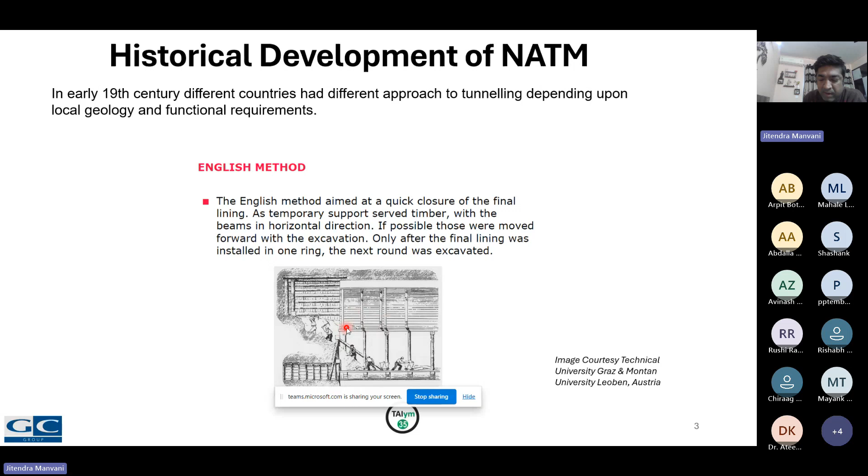I'll just take the pointer. If possible, those were moved forward with the excavation only when the final lining is installed. So after the final lining is installed, the next step is to do the next excavation.

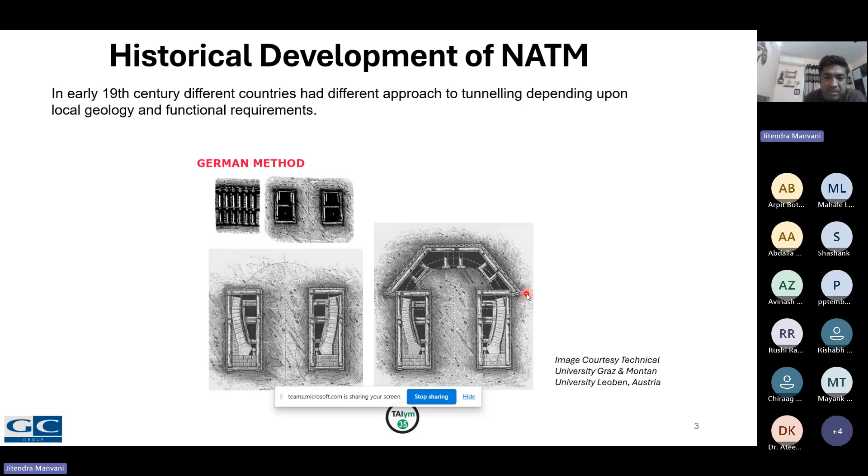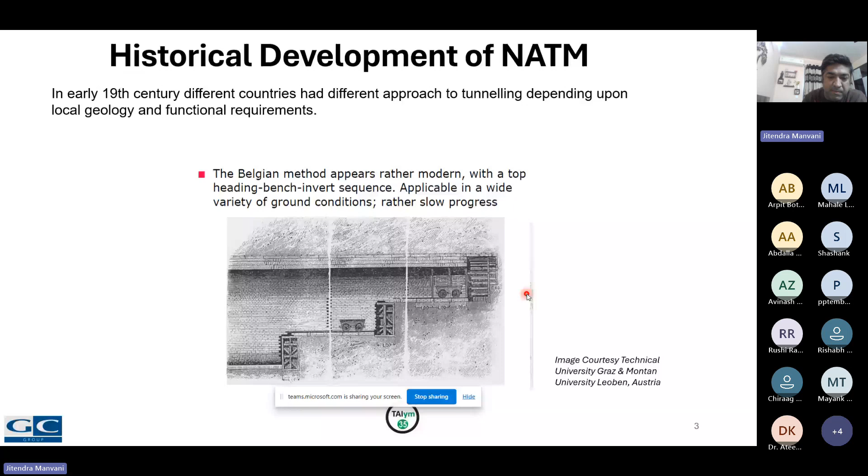The Belgian method is more modern compared to the previous method, having sequential excavation with top heading and benching, which is applicable for a wide variety of ground conditions. Because it is sequential, it will be rather slow in progress.

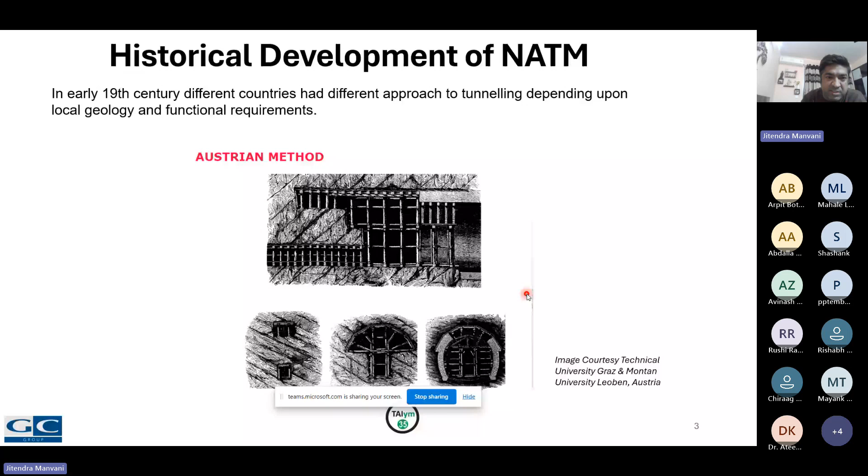The first idea of NATM: Rabcewicz in 1948 patented a tunneling method based on a double concrete shell approach, where the inner lining should be installed when the deformations have ceased. A quickly installed primary lining should avoid disintegration and thus development of dead load on the liner. With this method, waterproofing between the primary and inner lining was made possible, and the design of the inner lining can be done based on measuring results.

This is the sketch which was first presented in the lecture Geomechanics Colloquium in 1962 in Salzburg by Mr. Rabcewicz, where he gave the method the name New Austrian Tunneling Method. The original design is shown on the left side, which was later modified to optimize the design.

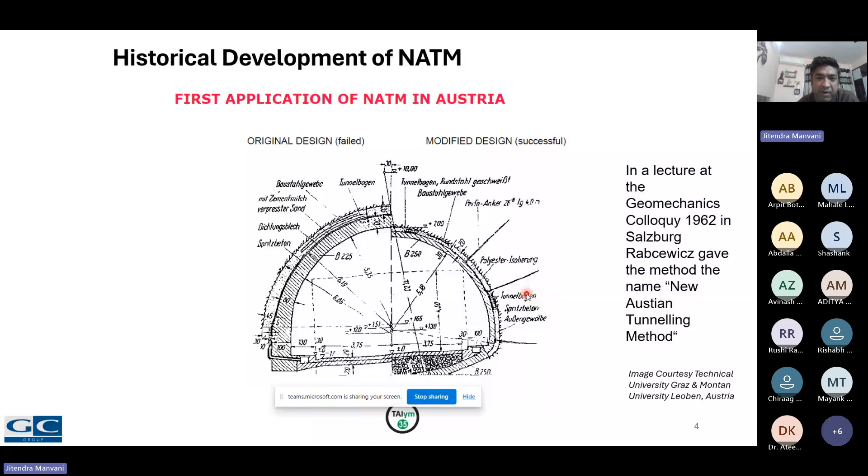This is an image showing NATM works. You can see clearly the top heading is already excavated and the bench excavation is in progress, with invert excavation yet to be done.

You can clearly see systematic bolts all around the benching and top heading, and somewhere the lining stress controller, meaning this particular condition is a squeezing ground condition with high overburden. To absorb the deformation, normally lining stress controllers are provided.

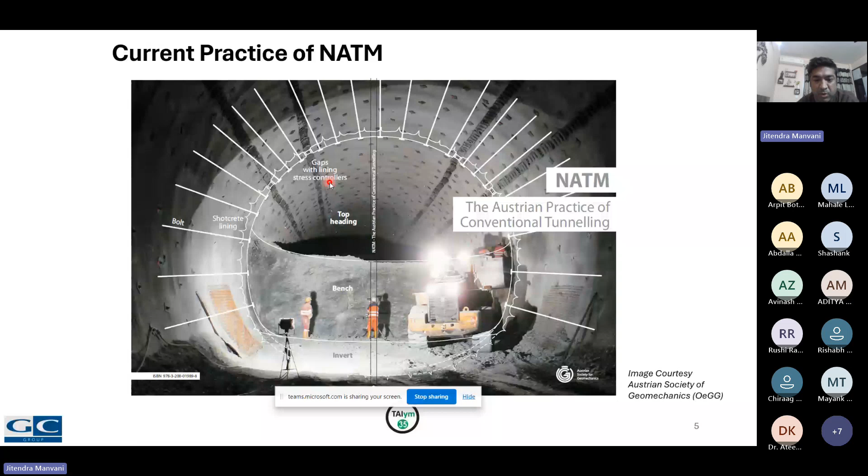So what are the basic principles of NATM? Firstly, you have to prevent the disintegration of the rock mass so that we can keep its original strength, using the rock mass as far as possible against additional stresses resulting from excavation. This implies that deformation should not be completely stopped right after installation, but has to be kept below critical levels so that loosening doesn't happen.

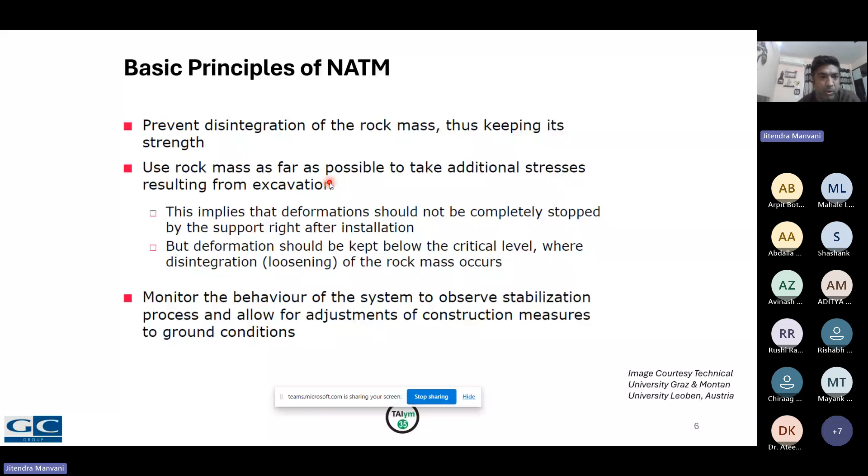Monitoring the behavior of the system is needed to observe the stabilization process and allow adjustment of construction measures as per the ground condition. That is an important part of NATM works.

I'll be briefing about the geotechnical design of NATM tunnels with cyclic or conventional excavation. This is a flow chart presented in the Austrian Society for Geomechanics Guideline for Underground Structures in year 2010. The first thing is to do the determination of the ground type.

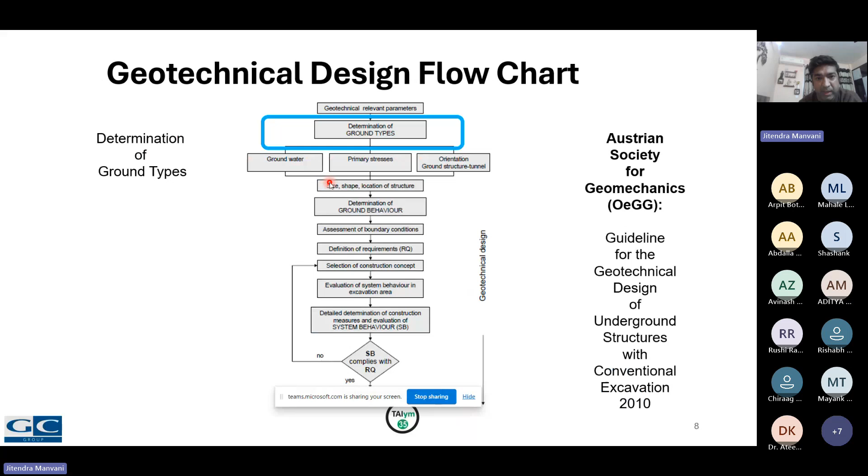That is the most important thing you have to do. How do you do the ground type determination? You first develop the geological model. How do you do the geological model?

This is an example of the results you get from the laboratory investigation. You get the mechanical properties of the samples at various locations: UCS, shear properties, tensile strength, modulus properties, and then you record the discontinuity data.

Not only from the surface, you can record discontinuity data from the borehole as well. So there are methods to extract this data, including discontinuity spacing, condition of the discontinuity, joint condition, etc.

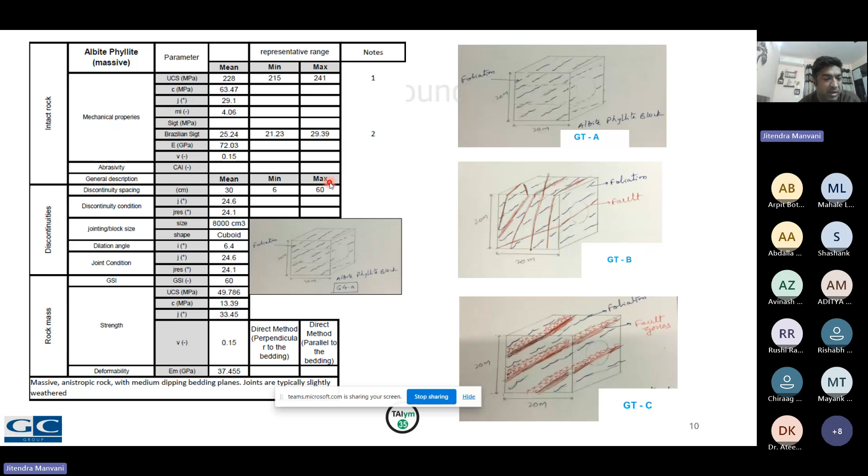GSI is important, and based on these inputs, you can derive the rock mass strength parameters, including the UCS of the rock mass, shear strength of the rock mass, and the deformation modulus of the rock mass, which is important for the design part.

After you complete the ground type determination, the next step is to do the ground behavior determination for the NATM works.

There are several influencing factors which govern the behavior type, ranging from the ground type. What are the stress conditions? What is the size of the opening, and what is the position, whether it is deeper or shallower? What are the discontinuity patterns, whether it's a single highly fractured jointed rock mass, or there is close spacing of the joints or higher spacing of the joints.

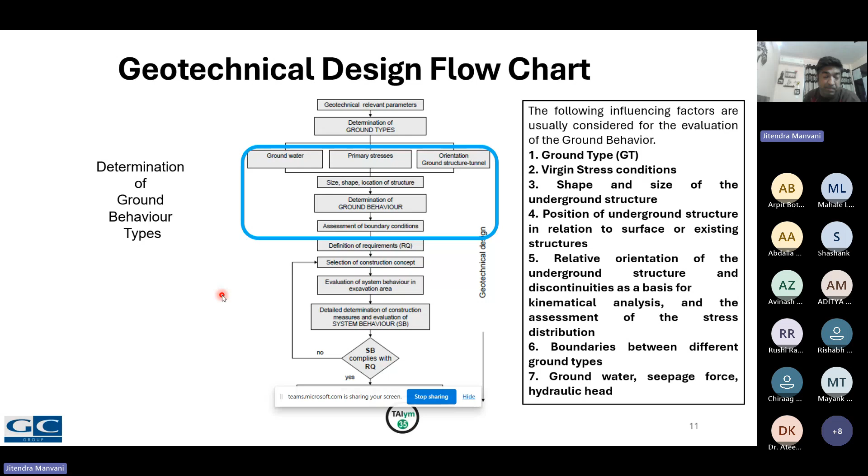This is very important to understand the kinematic analysis and the stress distribution in the surrounding, and the boundaries between the different layers. Suppose you have soil condition and then rock, you have different profiles, so those boundaries are important to understand. Other than that, details related to groundwater or seepage force are important to understand the behavior.

As per the Austrian guidelines, 11 categories of ground behavior have been classified. I'll be briefly talking about individual ground behavior. Stable ground - you can imagine a highly massive rock mass with very few joints. You can classify this as the first category accordingly.

In point two, it will be potential discontinuity controlled block failure. This is a kind of example where the rock mass has some joint sets present, but the spacing is far spaced, not closely spaced. Majorly voluminous discontinuity controlled failure, or gravity induced falling and sliding will be there. Shallow failure normally happens in both cases, with discontinuity failure and gravity induced failure. Point number 3 is the example normally seen in urban tunneling.

Voluminous stress induced failure is the fourth category. It's normally seen when there is large deformation. Where you have highly fractured or jointed rock mass with high overburden, there are large chances of high volume loss or large deformation. You can equate this with mountain tunneling, where high overburden is present.

Rock bursting is basically the sudden and violent failure of the rock mass caused by highly stressed brittle rock mass, where rapid release of energy takes place.

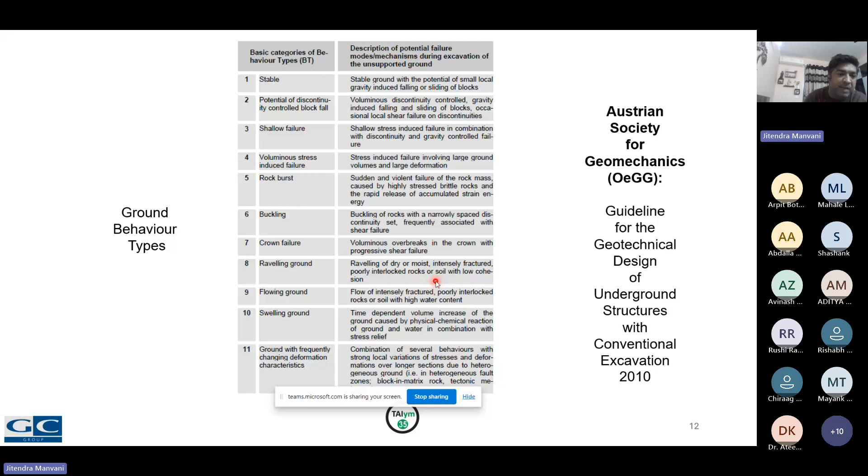I'll be showing some examples where you can see discontinuity controlled overbreak. You can see on the right image - this is one example of discontinuity controlled failure.

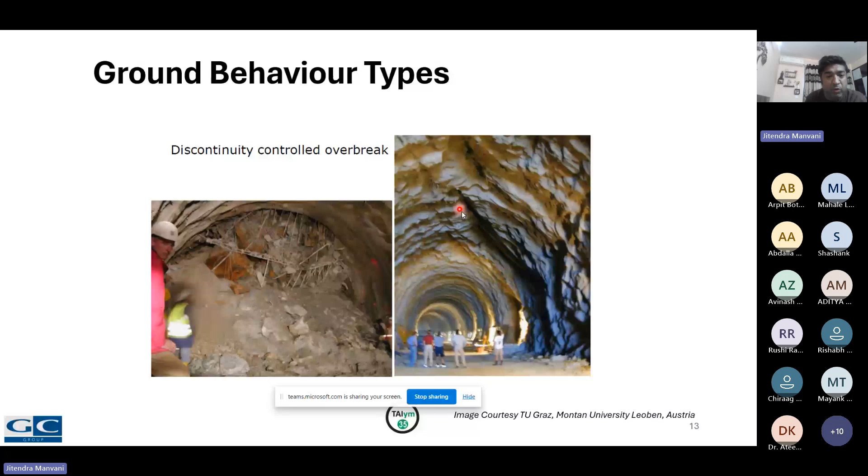The second image, if you can see on my screen, shows a large deformation that has taken place here, and because of this large deformation, most of the support has been damaged. This is a kind of failure where you have a high amount of stresses present.

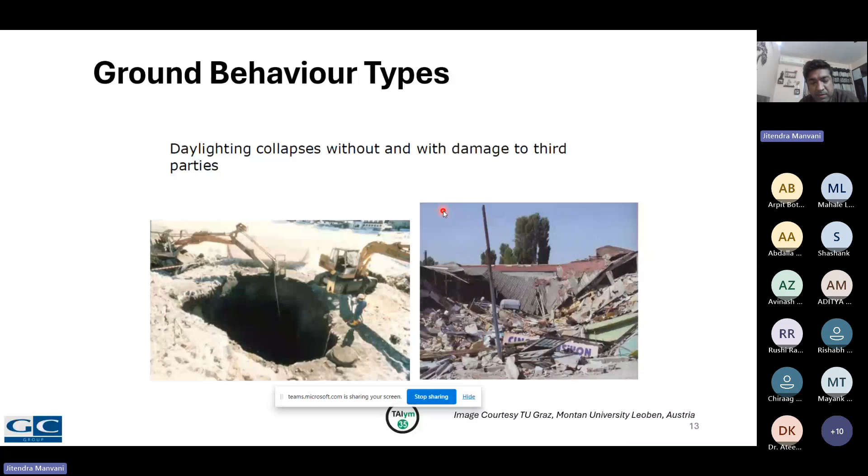One of the pictures I'm showing is where a collapse has happened, daylighting has occurred - sometimes it causes damage to third parties, and sometimes it is in open ground. This is one example where spalling has taken place in brittle failure with strong rock mass. This is normally seen in strong rock masses.

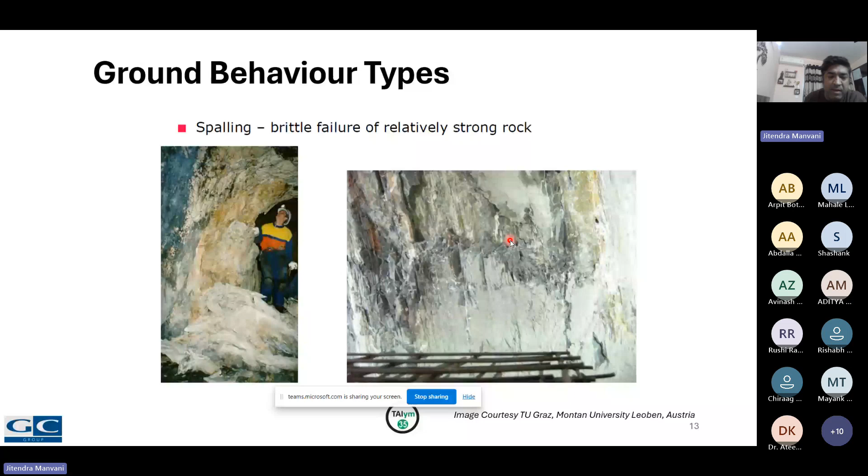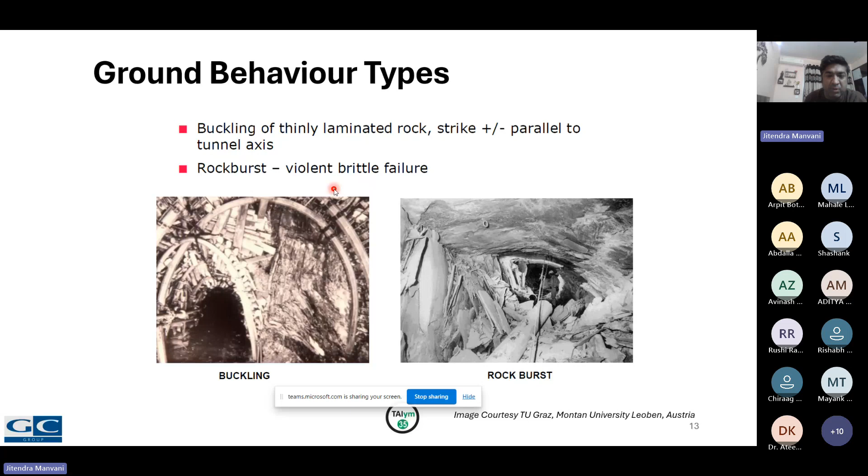So buckling, as I explained in the previous slide, where the joint plays a role, thinly foliated joint, buckling normally takes place. For the brittle rock mass with high accumulation of energy, rock bursting takes place. These are examples of these sort of failures.

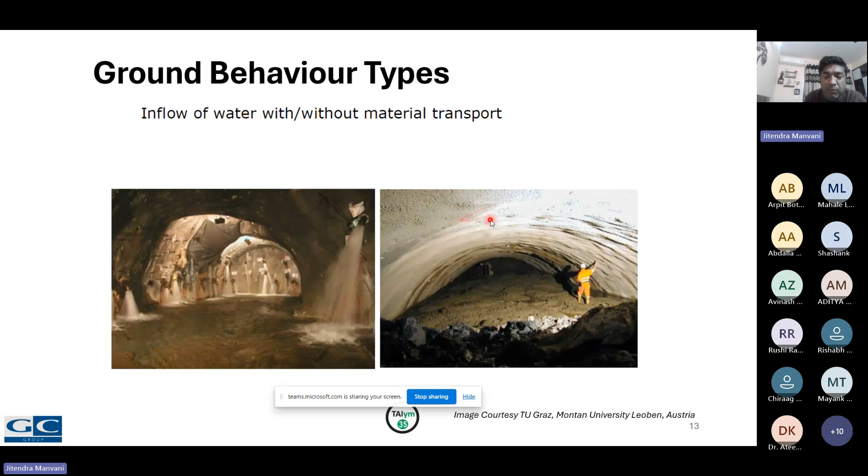Inflow, one of the behavior types I explained in the previous slide, where on the left side water is coming but there is no flow of material, whereas on the right side water comes along with the flow of material, which is a very dangerous situation.

Then after doing the ground type understanding and behavior type understanding, the next step is to understand the system behavior, or defining the support classes for a particular tunneling system. I'll be giving you a brief about some of the typical support measures.

This is a stable ground condition example where you can see full face excavation is normally permitted, where the ground is much better and only a limited amount of lining shotcrete thickness is needed. Only spot bolts are given to control local wedges only, since this is stable ground where the blocks are massive.

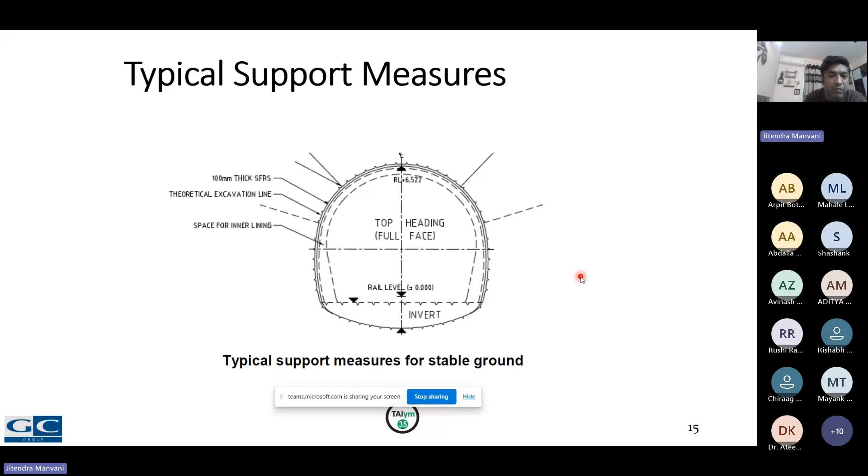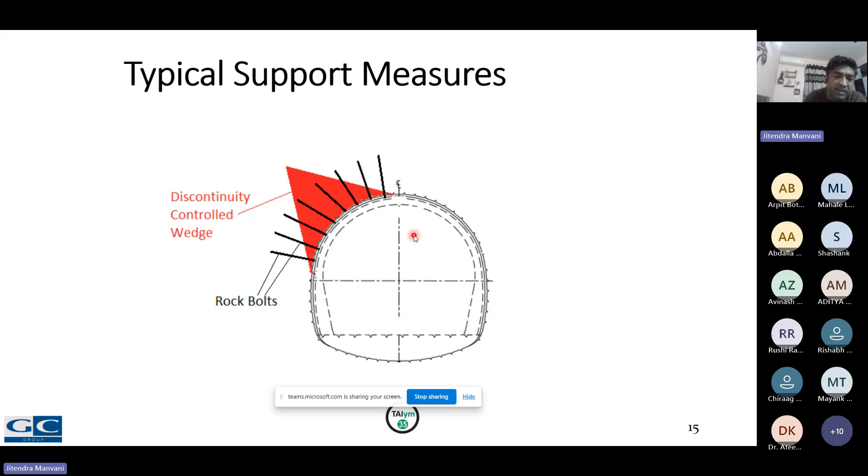This is an example where wedges are formed due to more than two joint sets, making a wedge, and you are stitching the blocks with the help of rock bolts. You give enough fixed length of the bolts to protect against this falling block. There are tools available in the software to check the design of these particular cases.

This is an example of shallow failure where, comparative to stable ground, the spacing of rock bolts is systematic, provided all along the overt and invert portion. The excavation may happen in stages or full face, depending on condition. The lining thickness will be slightly higher than the stable ground condition, normally around 150 or something, depending on condition. This is a typical example.

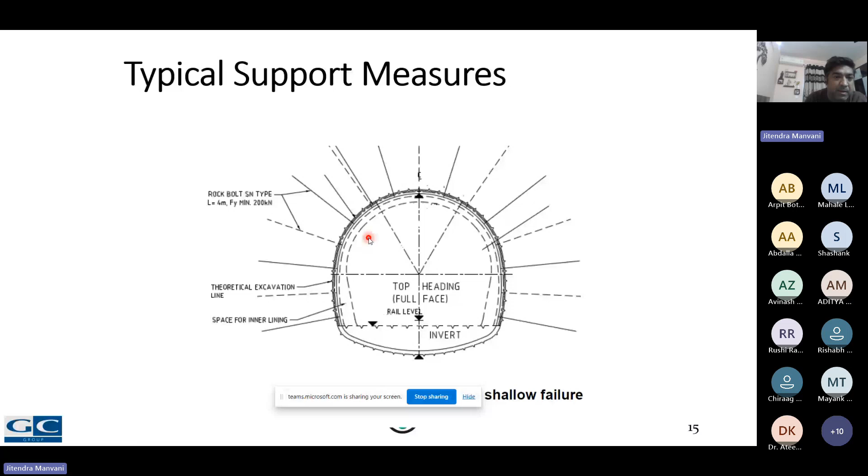This is an example where you have a high stress zone and you are completely in fractured rock mass or soil condition. You can see the excavation has been divided into three zones: top heading done separately, then bench excavation, and then invert excavation.

One of the images I earlier presented. So where you have weaker condition, you definitely have fore-poling on the crown part, and then you have the temporary invert, and the elephant foot to cater to the stress, the high stress transferred to the ground surface, and comparatively longer bolts closely spaced.

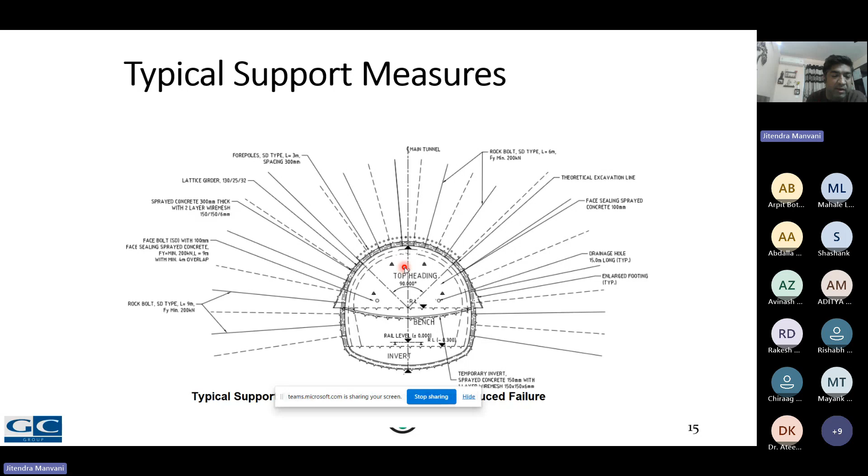Again, with weaker ground, face stability is very important, and relieving the pore pressure is very important. So you see a large number of drainage holes and face stability bolts. The thickness of the sprayed concrete is also higher, more than 300 mm, with two-layer wire mesh and lattice girder.

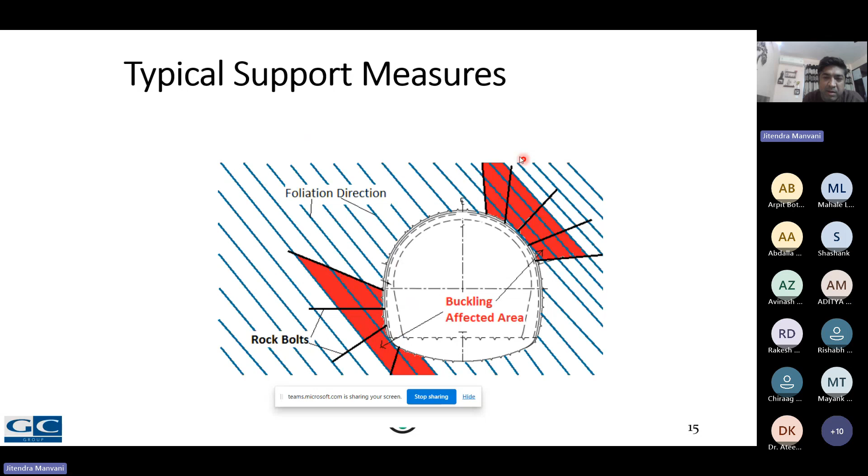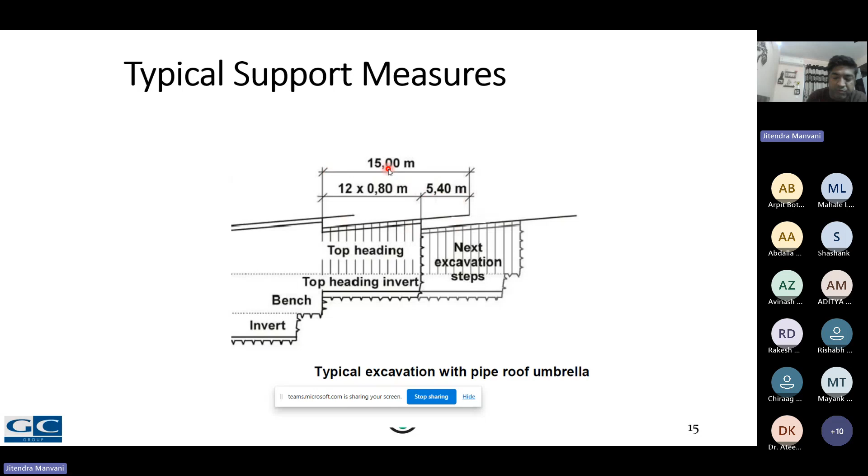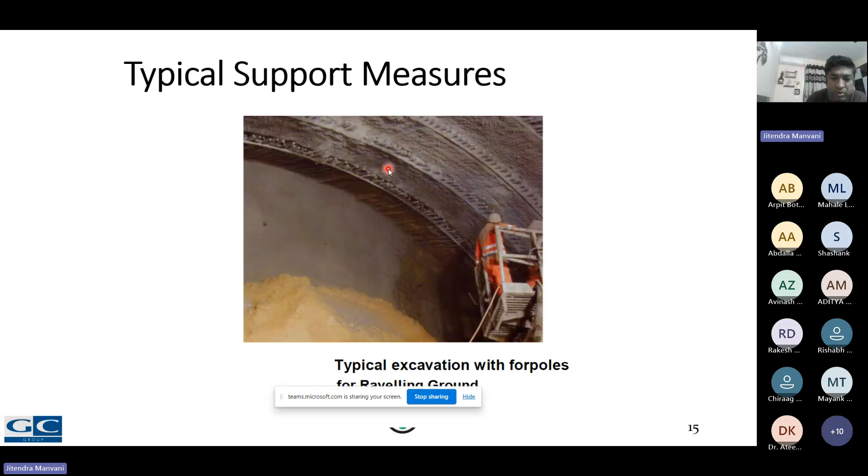This is a typical image of the ravelling ground condition I explained in the previous slide, where there is moist or dry condition present, and very weak strata where there is almost no cohesion or shear strength. This is the type of support you normally recommend.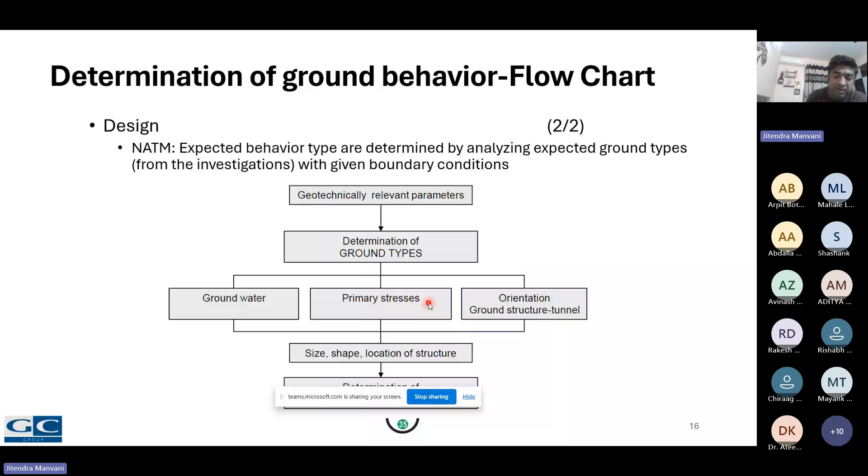A typical flow chart of how we do the design. Once we have the geotechnical relevant parameters and we determine the ground types, we have some boundary conditions such as groundwater stress condition, orientation of the tunnel, size and shape and location of the structure. We are able to determine the ground behavior with the help of design models. This has been presented in terms of a flow chart.

Some challenges I will be talking about related to instrumentation. As you know, instrumentation is a major pillar of NATM. Sometimes what has been seen on site is intermittent interpretation and evaluation of the monitoring data, which normally weakens this major pillar of NATM.

I will present my case with an example. You can see a plan of the tunnel presented, and the L-section of the tunnel presented, and below the graph of the vertical displacement. Once the tunnel is entering close to the fault zone, you see a sudden increase of vertical displacement taking place, and then once it has entered the fault zone, it again comes back to normal.

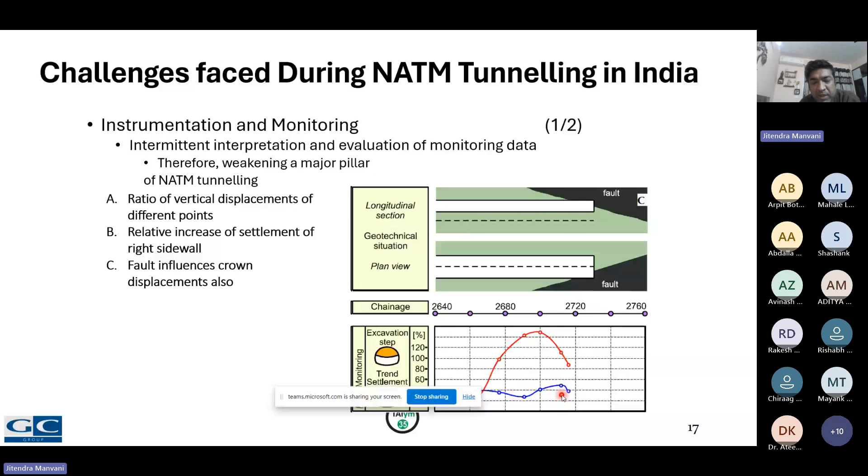Crown displacement, shown in blue, is also getting impacted because it is hit on the right wall. So the right wall is majorly hit, but the crown is also hitting. Once it has entered fully into the fault, it is back to normal. These are important aspects which help you understand how important instrumentation is for tunneling.

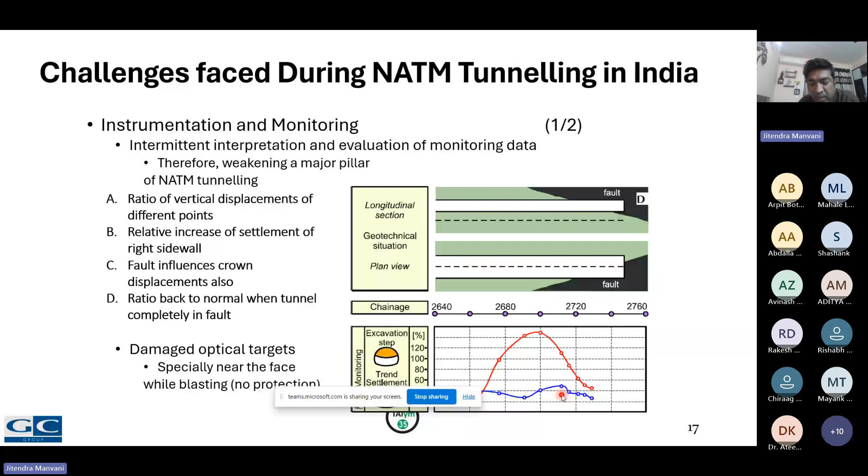Sometimes what we have seen is that targets are damaged. This is very common, especially near the face where no protection is given, and due to blasting most of the targets get damaged. So that has to be considered in NATM designing.

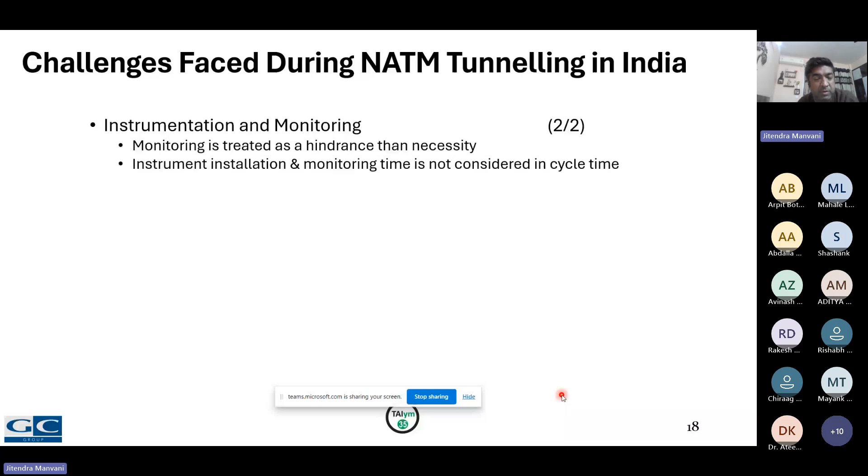Sometimes monitoring is treated as a hindrance rather than a necessity. That is a very important thing that has to be considered. In the cycle time analysis, instrumentation monitoring is not considered separately. This is one of the things we have to take care of.

Sometimes the survey team is asked to do the monitoring rather than engaging a separate dedicated monitoring team. I'm not saying every project does this, but some of the projects we have witnessed, we have seen these things, where they are asked to do the monitoring along with the surveying, which should be avoided.

Some execution related challenges I wanted to highlight: sometimes, as per the designer's recommendation, the support has to be installed right after the face excavation, but sometimes more than 2 or 3 rounds are exposed without any support, which makes things critical for any tunnel.

For weaker ground conditions, we give the elephant foot for transfer of stress. Sometimes during benching, that elephant foot is chopped away, which is not good for the tunneling. It makes things critical.

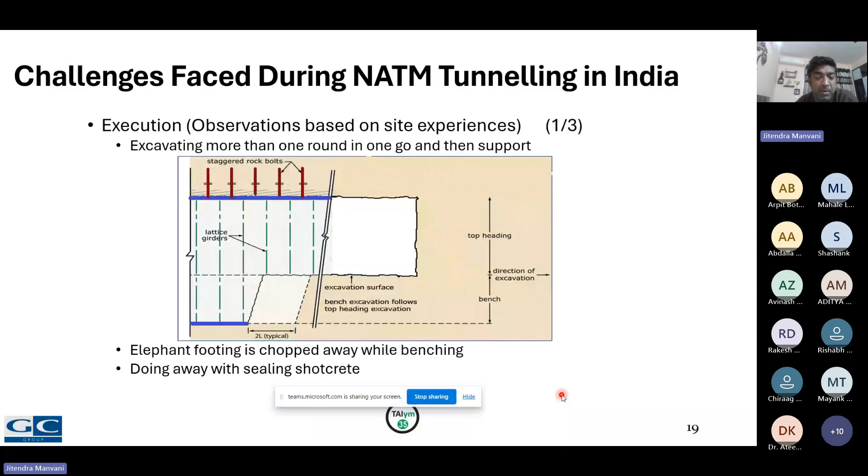Sometimes the sealing layer, which is an important aspect - when you do the tunneling you should immediately apply the sealing layer, but sometimes it has not been carried out at site. Old shotcrete machines are used which are unable to apply more than 50 mm thick lining, so that has to be avoided.

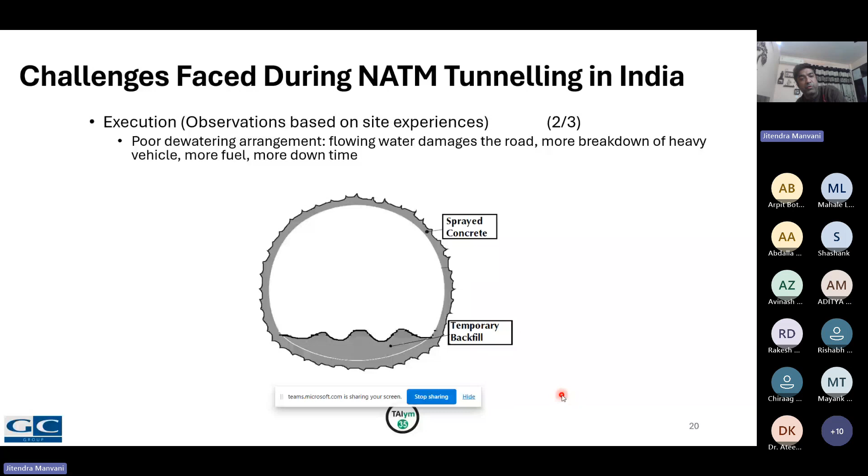Some execution related challenges: for example, when water is getting accumulated on the surface of the tunnel, it makes the road damaged and causes more vehicle breakdowns, which costs more fuel and more downtime. So that has to be taken care of. Channelizing of water is an important aspect.

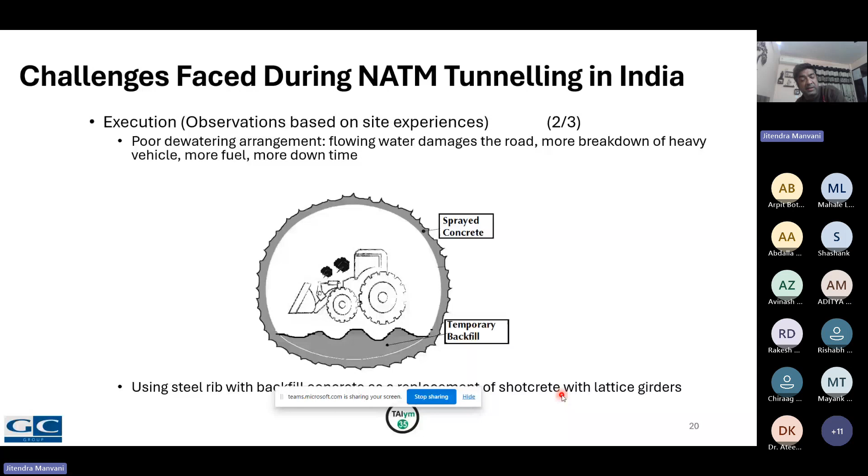Sometimes steel ribs and backfill concrete are used instead of shotcrete and lattice girder. One common thing we have seen is the backfill concrete for vehicular movement constructed with conventional concrete, which makes a bond with the invert, and when you take out the backfill concrete, it breaks along with the lining, the invert lining, which makes things difficult.

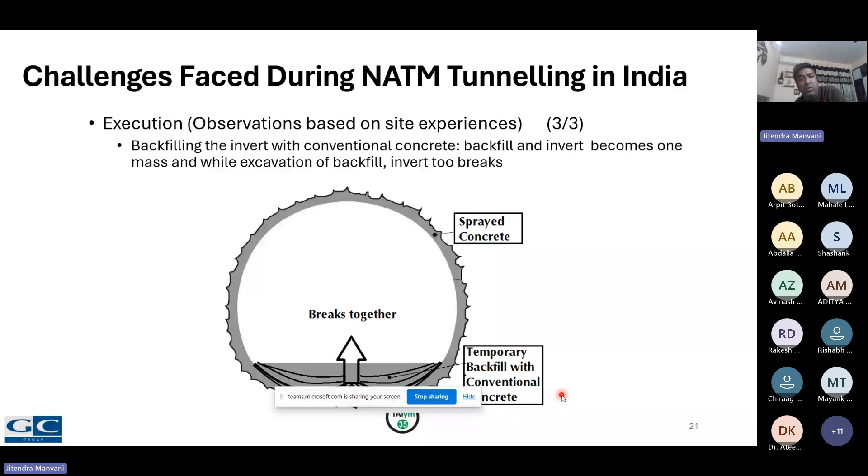Some educational institutes are there now. Things are improving, but still very few institutes offer tunneling related courses. For many government clients, decision making is absent, which is crucial for tunneling.

We normally need 24-25 meter width to construct a complete cut and cover station. Because of urban tunneling challenges, we were unable to get this required width, and hence we were bound to do part cut and cover and part TBM to overcome the challenges related to urban tunneling.

As per my previous explanation, first you develop the geological model, then the geotechnical parameters. After that, you develop the basic construction sequence, and then you do the analysis, whether analytical, empirical, or numerical. Then you evaluate the results from the sequence and the models.

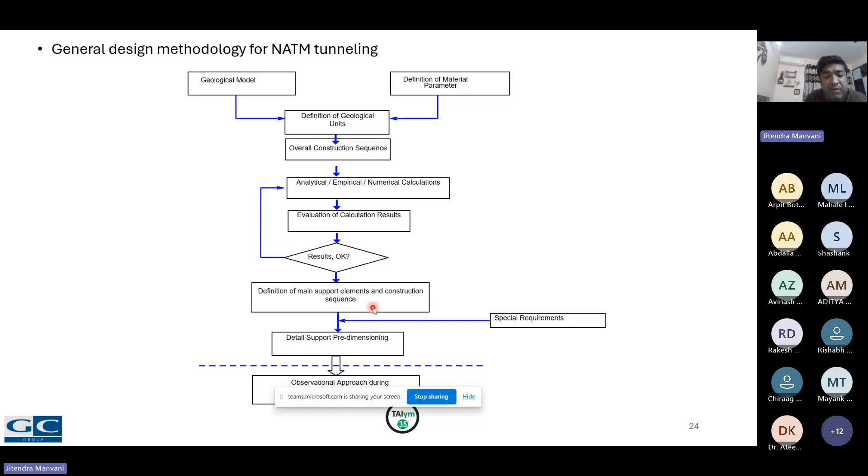After this, you have to execute the drawings, but it's an observational approach. Whatever you give to the site has to be monitored, and accordingly, if any amendments are required at site, you have to do them.

So the plan I've shown previously, the section will look like this. I will brief you. This is a cut and cover station. You can see the depth of the station is around 23 to 24 meters below ground, and this is the tunnel which you can see from the earlier plan.

It's constructed right close to the cut and cover box, and this is connected with the help of cross passages at various intervals. This is the isometric view of the TBM tunnel section and the cross passage.

The first stage is to complete the cut and cover works up to a certain level, and then the TBM will pass through the station, with application of the sacrificial segment. Once the cut and cover reaches the bottom, you fill down to the bottom of the top heading of the cross passage, and then you can go ahead with construction of the cross passage. I'll explain this on the next slide.

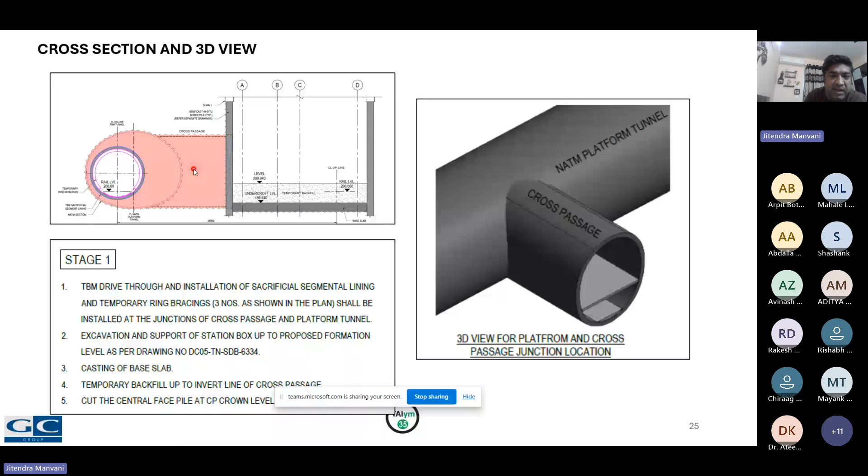Once we complete the fill part, we can start excavating the cross passage. This is the standard sequence where the section of the cross passage will look like this. Only this part we have started constructing. So we apply the pre-support before the entry into the cut and cover.

Then we apply drainage holes where required. If seepage is high, you apply more drainage holes. Then you enter with the help of the forepole, and apply rock bolting and supporting. You do it in 3 stages, which I explained as 1T, 2T, and 3T, till the corner of the TBM tunnel. The section will look like this.

After each round of excavation, you have to apply the sealing layer. After completion of the sealing layer, you install the lattice girder and the remaining thickness of the shotcrete. I'll explain the support system in the subsequent slides.

Once you touch close to the NATM tunnel, you start changing your section slightly to the vertical, and it is very important that you follow the sequence, because we are entering into the NATM. Additional support measures in the form of GFRP bolts are recommended. This excavation has been done with a proper rock bolting system on the side walls and also onto the crown. Once you complete the excavation, you have to immediately apply a sealing layer after each stage of excavation, and then apply the remaining layer of sprayed concrete lining. This way you can enter into the NATM tunnel.

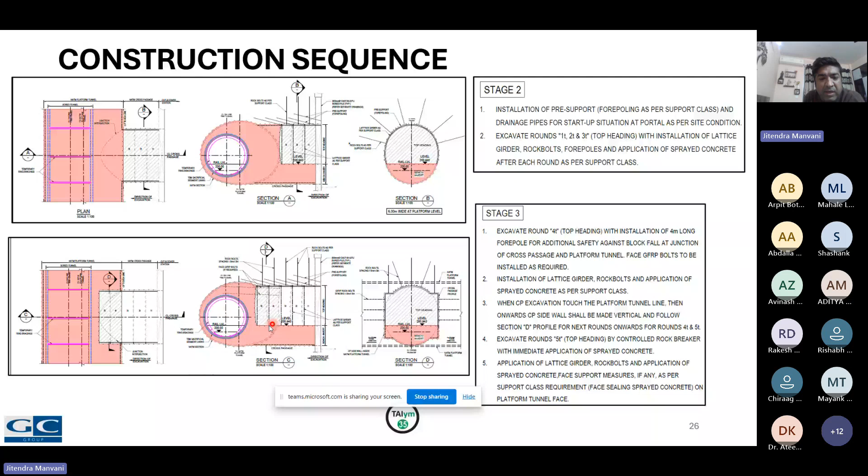So the next step, once you've entered into the NATM tunnel, here is the plan. You can see we have now entered into the NATM tunnel with a different section. Now the section is wider - it is the intersection zone. You divide your excavation into two stages. We call this portion top heading 1. The width may be around 3 meters, and the length will be around 4 to 5 meters. This portion looks like this in section, and this portion looks like this in the L section.

These parts of the construction I call 6T, 7T, 8T, 9T, and 10T. This height will vary for different sections - as you can see, I'm showing the maximum section here, so it will be reduced in subsequent stages. Again, you have to install the sprayed concrete lining, install the lattice girder, and apply the remaining shotcrete after each round of excavation. After completion of this part, you can take on the other top heading 2 part in the same manner and apply the support system accordingly.

Once you complete your junction part, now you have the face available for the NATM tunnel works. This portion shown on the plan, you take on first and this second portion - we call it 16 and 19T - with the top heading excavation. Whatever is the sacrificial segment, you remove it, do the remaining excavation of the NATM tunnel, apply the support, and continue with the top heading excavation.

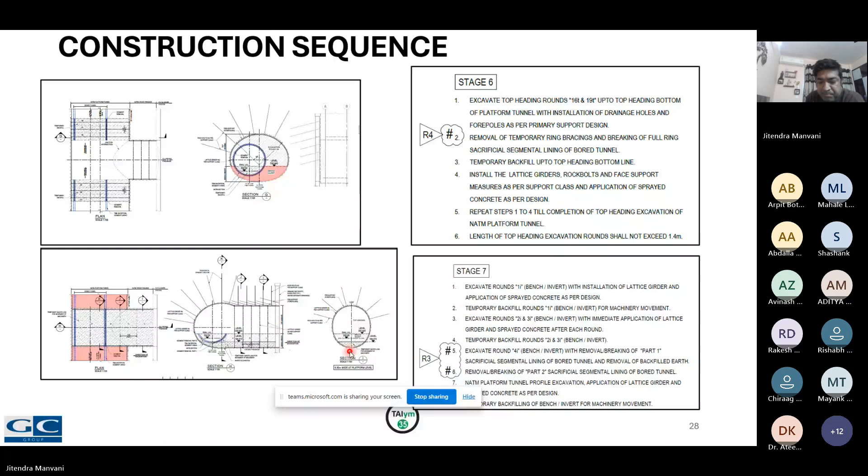In the same way you can do it for 4I, but you have to remove the sacrificial segment in stages. After doing the cross passage invert, you can carry on the excavation of the NATM platform tunnel invert in the same manner, using sequential excavation.

After the planning of the sequence, now I will brief about the type of geology we encountered for this particular problem. We have basically filled-up material for the top 3-meter layer, and then the next 3 to 4.5 meter layer is silty sand. In the cut and cover design, constructed with the help of D-walls, the ground level was taken slightly on the higher side, so the total depth of soil was conservatively taken as 8.3 meters.

We derived the rock parameters, given in the basic geotechnical parameters as I explained in the previous slide. You can see this occurred in poor quartzitic rock, where the rock class is grade 4, and the deformation modulus is in the order of 600 to 1200 MPa, with a good amount of friction and cohesion. So it is a kind of good rock mass you can consider, but not very good - comparatively blocky rock mass.

This is one example of how we use the modified generalized Hoek-Brown method, using the RocLab tool, by taking inputs for GSI and UCS from laboratory investigation, to derive our rock mass parameters. This is one example of the grade 4 rock.

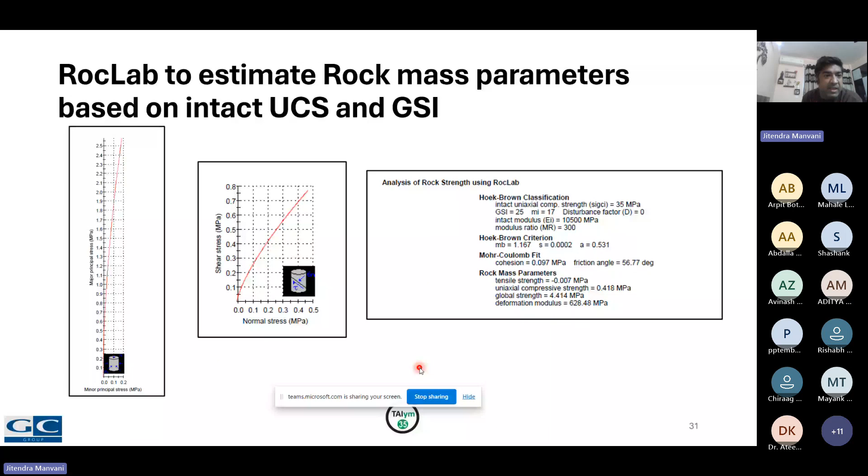After doing the previous aspect, the next thing is to do the convergence confinement. Convergence loss is a very important aspect - you need to know where to apply the support system, based on whatever relaxation has taken place. So we use the convergence confinement method by Marc Panet to derive the convergence assigned to our design models. For doing this, we calculated the sectional area of our tunnel excluding the TBM.

So we calculated the equivalent radius correspondingly, and for the pull length which we have assigned for our design, we calculated the relaxation at different lengths. And these relaxations we simulated conservatively for our RS2 analysis. You can see the station and the TBM has been done in the earlier stages, and then for the rock pillar which is connecting the cut and cover station, I'll be just briefing the section.

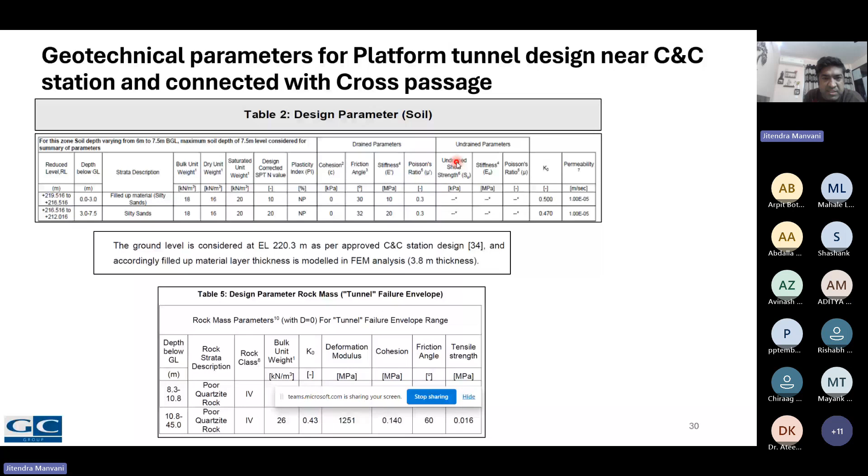So rock pillar is basically this is the rock pillar which has been simulated with the help of the RS2 modeling. I'll be explaining the next slide. You apply the relaxation at the excavation phase, and then sequentially apply the relaxation for the top heading portion, and then subsequently after the completion of the top heading, you apply the relaxation in the same manner for the benching and invert portion.

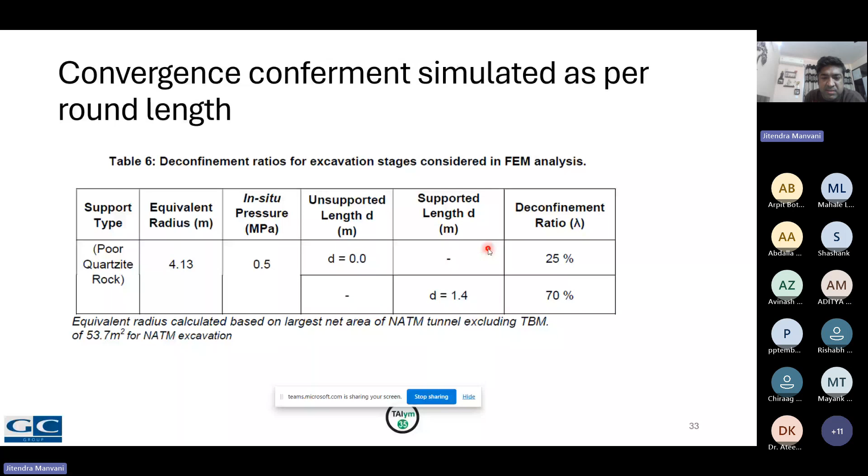So this is the summary of the relaxation we considered at the face as well as at the point of the support installation. So how we did the modeling? Basically, I wanted to highlight this is the NATM tunnel we would like to design. There is a pillar which is connecting the cut and cover station with the NATM.

So basically, what we tried to do, because of the construction of the TBM and then cut and cover, the stress field before the construction of this cross passage will change due to the prior excavation activities. Hence, the cross passage is modeled. So this particular cross passage is separately modeled in the modified stress field, which has been achieved by increasing the unit weight. So you can see this layer, we increase the unit weight.

So how we did this actually, I'll try and explain in stages. We created this model one, firstly, where we model the NATM tunnel along with the TBM and the cut and cover, and then at this pillar, we find out the variation in the stresses. So whatever variation of stresses are there, proportionately we increase the unit weight.

Suppose this particular layer, the increase of the stress is 3 times, so unit weight proportionally increases. This particular layer, it is 1.5 times, so accordingly unit weight is increased 1.5 times. This is done to simulate the ground behavior at the pillar location.

So after constructing the model, one important thing: relaxation for the cross passage has been considered 100% conservatively to check the stresses due to the CP excavation. This is a very conservative assumption. Normally, you have some relaxation, not 100%, but it is conservatively considered here.

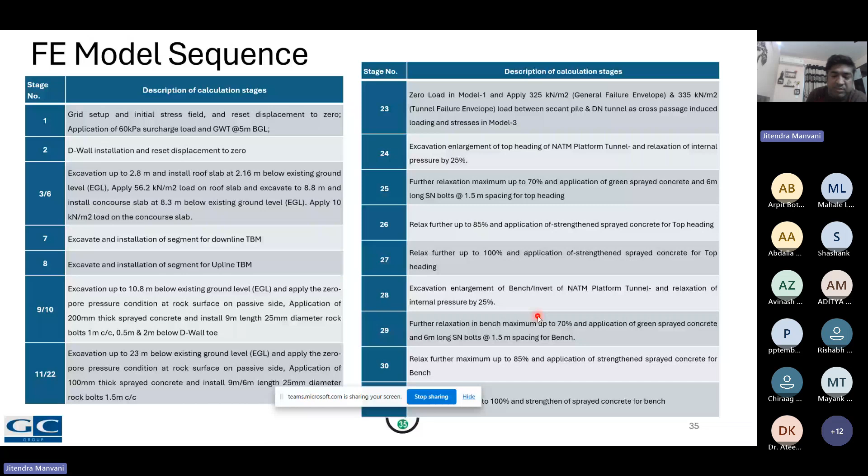So you apply the relaxation at the excavation phase, at the point of support installation, and at the intermediate stage when your shotcrete achieves a required strength, 70% strength, and then you complete the sprayed concrete to 100% strength, which is far away in distance from the face of the tunnel. In the same way, you apply the relaxation and the application of sprayed concrete for the bench and invert portion as well. So after doing this, this is the summary of the results which we found out.

You can see the deformation is in the order of 13 mm in the crown portion, and the side wall it was in the order of 9 mm.

This is where the ground condition was much better. Therefore, you can see this range of deformation and settlement with so much construction activity is in the order of 17 mm. And the forces we found out are in the order of 1327 and 34 bending moment.

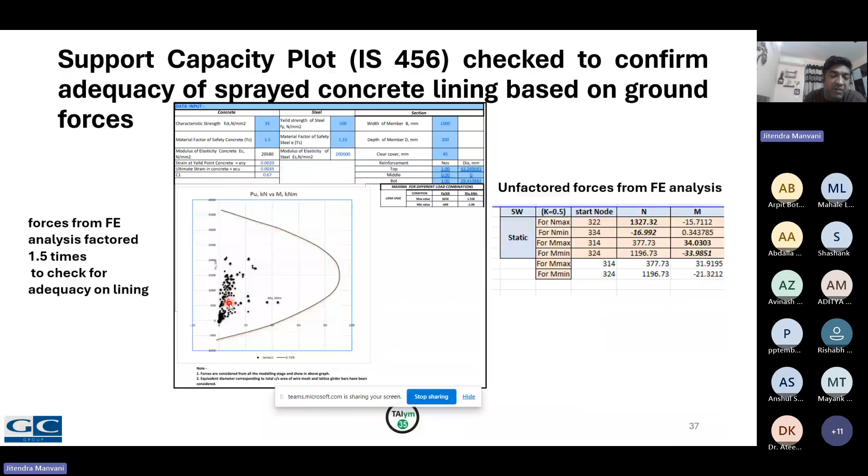These forces we extracted and then factored to check in our internal design spreadsheet, developed based on IS 456, where we use reinforcement in the form of lattice girder and wire mesh, and check the support capacity with different force points within the limits. So this is how we justify the adequacy of our support system.

Now once the design is ready, we recommend lining thickness of 200 mm and SN bolt length of 6 meters, 5 to 6 meters in range. Close to the cut and cover, the length is slightly reduced because of interference. However, for the other zones, it is 6 meters.

Forepoles have been provided at alternate rounds in the platform tunnel, and 200 mm thick lining with 2-layer wire mesh with lattice girder has been recommended. And accordingly, support has been given.

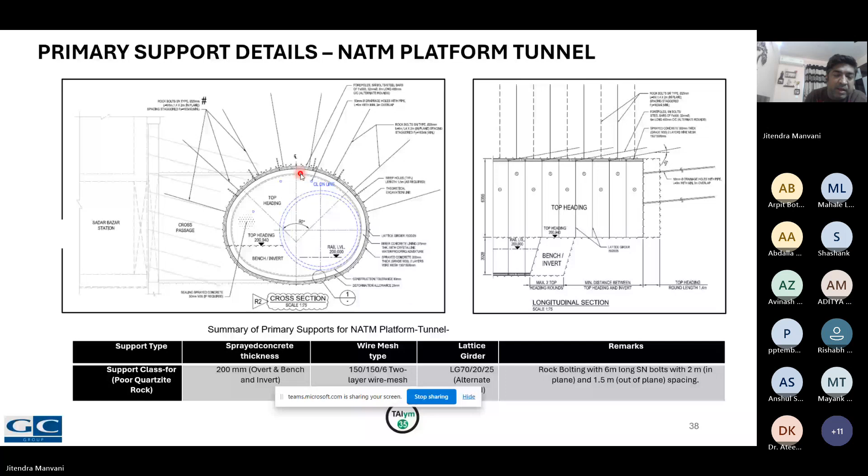Importantly, drainage pipes are provided to release water pressure, and weep holes along every round have been provided so that water dissipates and does not create any issues during construction.

Similar support system was recommended for the cross passage, which connects the cut and cover to the NATM tunnel. The section is slightly narrow in width, but height is more or less the same. So however, we kept the support the same, with the same length of bolts and almost the same spacing of the bolt, as well as the forepole and all other things.

We kept it the same. The cross passage is slightly critical, so rather than alternate rounds, we kept the forepole on each round because the length is normally 6 to 8 meters.

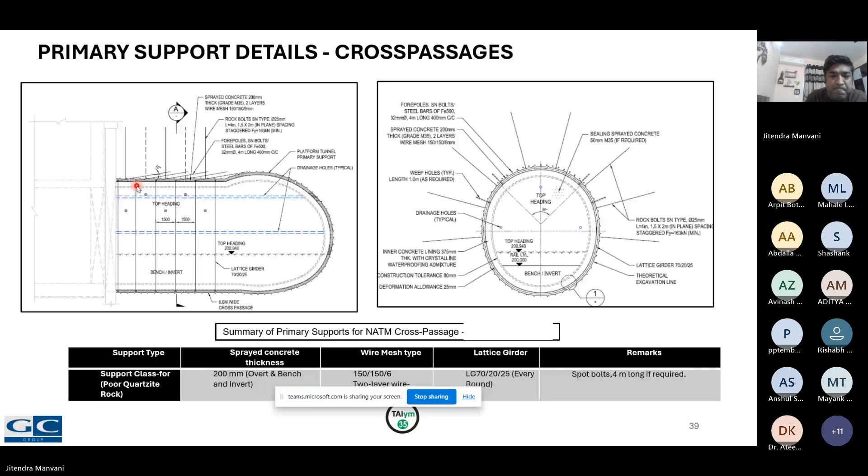After doing the primary support design, the most important part, as I addressed in my previous slide, is the monitoring aspect. At every cross passage location we come up with section A, which has more instruments, whereas in section B we give only optical targets every 5-meter interval. At the junction, on each side, somewhere in the middle, we give more instruments. I'll show you the section we used.

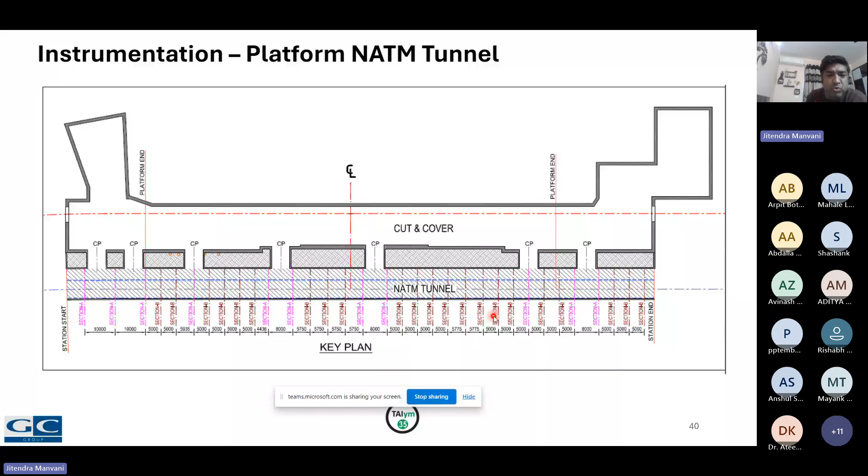In Section A, you can see detailed instruments are there, which consist of load cell for the bolts, strain gauge to monitor the strains, radial pressure cell to get the pressure on the shotcrete lining, and 3D targets to monitor horizontal and vertical deformations on the crowns, sidewalls, and the invert.

So how do we derive the alert-action-alarm limits? Basically, whatever we got from the RS2 modeling, we convert this force into stresses, and with the help of hoop stress theory for thin cylinders, we get the radial stress. The formula is P into R by T, where P is the stress coming onto the liner, and with the help of the thickness of the lining and the radius of the tunnel, we get the radial stress, and we divide our limits into 0.5 times serviceability, 0.8 times serviceability, and 1.0 times serviceability.

For the strain gauge, we use the modulus of the lining, the factored modulus. Normally it is 29 GPa, factored to about 0.8 times. Then using the relation E equals stress divided by strain, we get stress over strain and find the micro strain, and from that we give the alert-action-alarm limits accordingly.

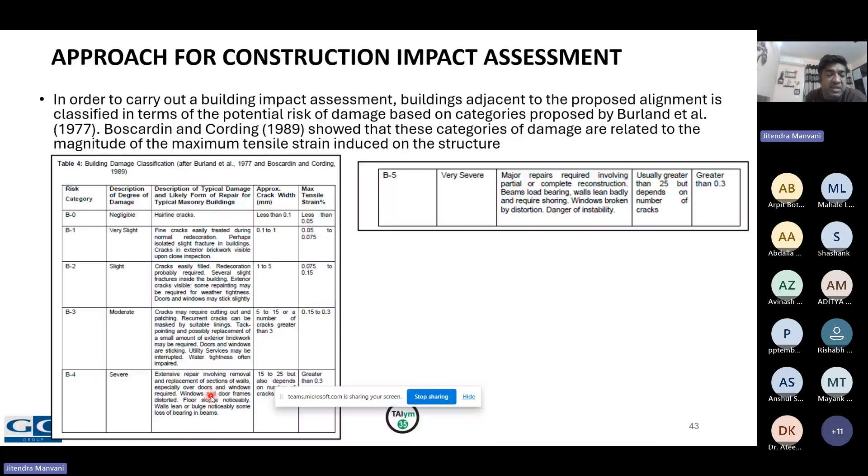You can equate these things with the damage to the buildings, where the cracks are hairline only, or fine cracks are there, or buildings needed extensive repair or major repairs. So you can classify with the help of this.

So for doing this, there are 3 steps of assessment. The first step is to develop the influence zone surrounding the stations. Normally we consider 30 to 50 meters for the station boundary. Whatever is the edge of the station, you consider 50 meters surrounding, and you do the precondition survey for whatever buildings fall in that particular zone.

Then you do the settlement analysis by means of empirical correlations. You have already done the FEM analysis, where you already model the cut and cover and NATM together, so you can use that settlement trough to get the stage 1 assessment.

So simply the buildings which are beyond the 10 mm contour, you have to exclude for further assessment. Those buildings need not be further analyzed, whereas the buildings within the 10 mm contour are further analyzed for stage 2 assessment. How you do the stage 2 assessment? I'll be explaining in the next slide.

You have to gather the information of the building position - what is the building position with reference to the station, or if you are doing it for the TBM, from the center line of the alignment. These are some categories, I'll be talking majorly about the station - so it is from the edge of the station. What is the distance of the nearest face and the farthest face?

What is the height of the building? Whether the building is a masonry building, you consider E by G ratio separately, 2.6 normally. If it's a frame structure, you consider 12.5 E by G ratio.

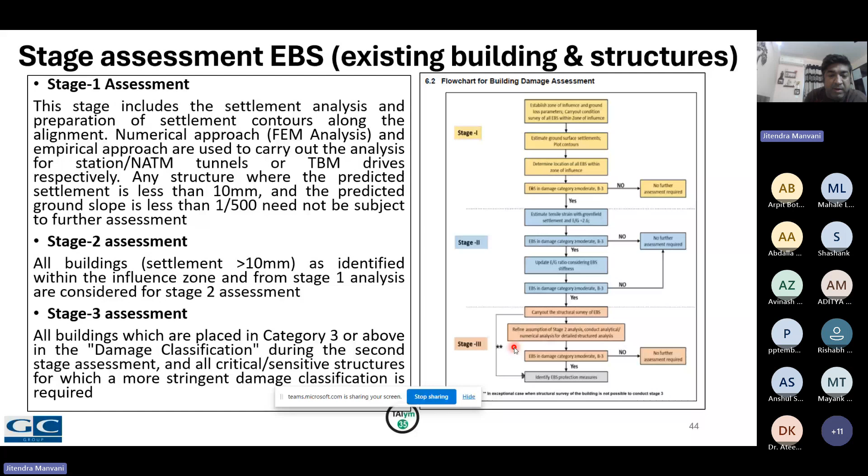But there is another way also - the buildings which are in moderate or severe category, if structural survey is not at all possible, you can develop a separate protection scheme for those particular buildings. These buildings are rigorously monitored. It has to be completely repaired in terms of propping. You have to do the crack repair, major repair, wherever it is required, as per the requirements.

So this is one example of how we do the stage 2 assessment, as I explained in the previous slide. You find out the settlement curve from your settlement trough with the help of your stage 1 assessment. For example, you have the boundary of the cut and cover station, and then you develop the vertical settlement, and based on the position of the building - the nearest face and the farthest face - you find out what is the differential settlement.

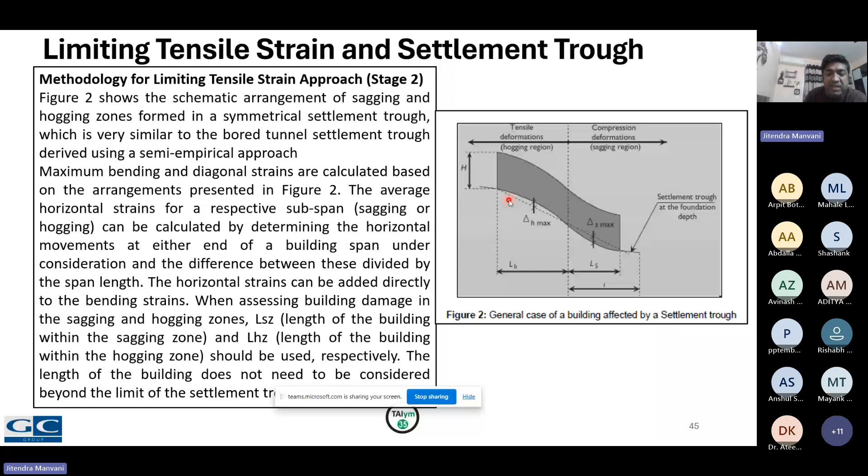And based on the differential settlement, you find out the tensile strain, and accordingly you classify the building. One important thing - whatever precondition survey you did based on the influence zone, you can take the impact of that precondition survey to your stage 2 assessment to give a combined stage 2 assessment, and then classify your buildings accordingly.

And some buildings where you need a structural survey if possible. If not, you need a detailed protection plan. You need sometimes real-time monitoring during the excavation of the station, so that you protect these buildings.

Because uncertainty can happen anytime, you have to be ready for all sorts of uncertainties.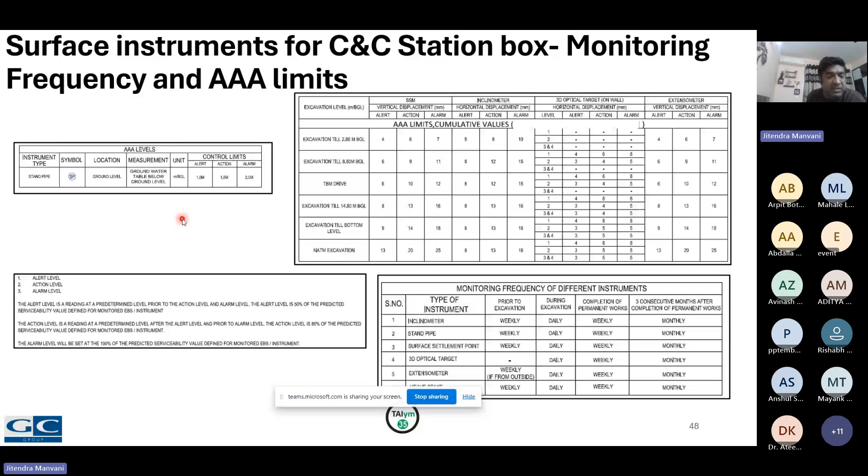As I explained in the previous slide, if you cannot refine your stage 2 assessment with the help of structural survey, you have to rigorously check the buildings wherever repairing is required, wherever propping is required, wherever cracks are required. You have to show it with the help of the survey, whatever is available from the protection monitoring reports and the precondition survey report, and then provide detailed instrumentation of these buildings. Sometimes regular monitoring with the help of real-time monitoring instruments is also required for buildings close to the stations.

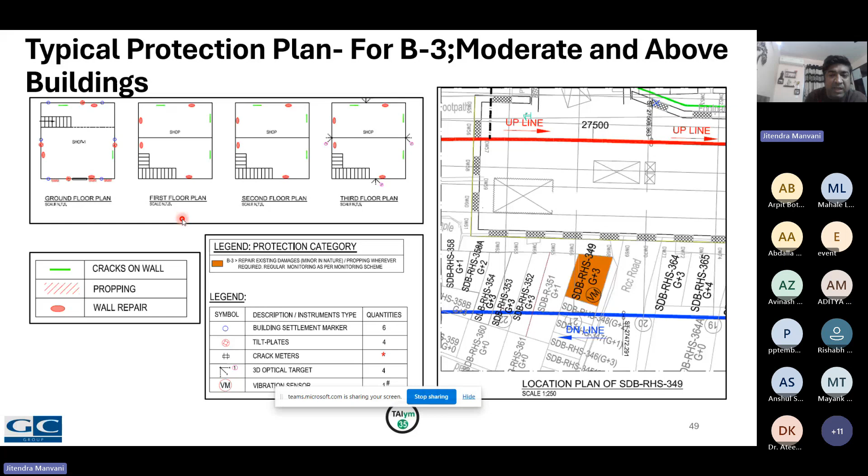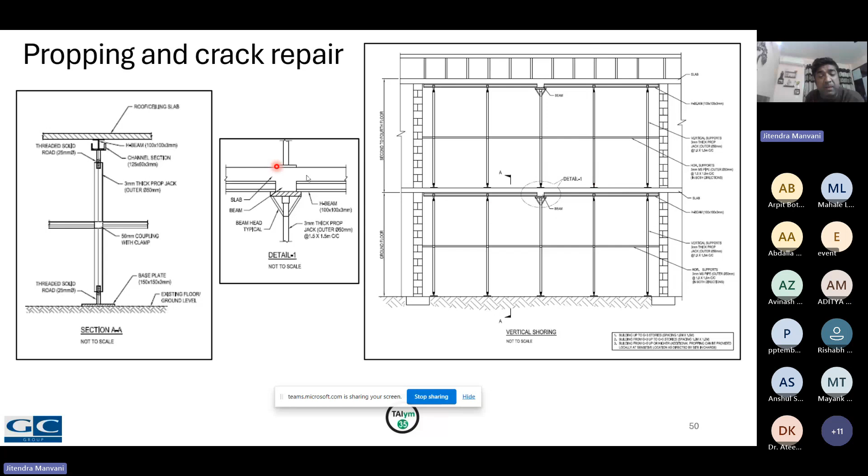For crack repair, there are 2 sorts of crack repair. If the cracks are less than 5 mm wide, you take out the plaster, repair the crack, fill the sealant, seal the crack, and then redo the plastering.

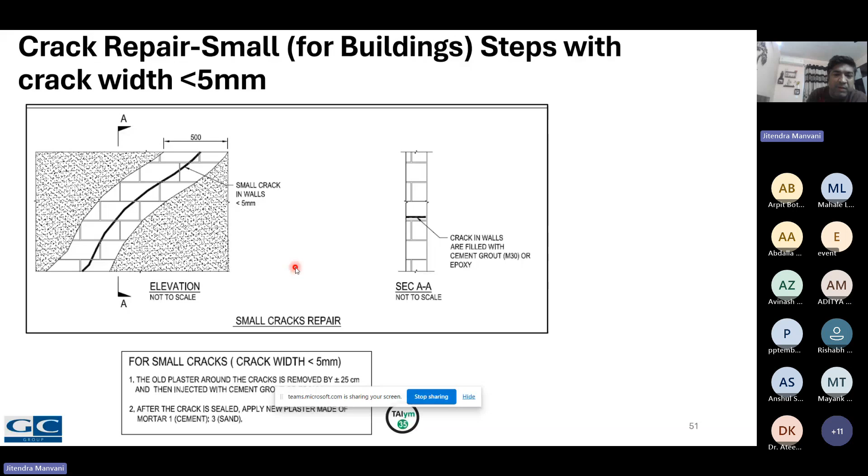That is what we normally recommend for the damaged buildings. Similarly, for buildings which have cracks more than 5 mm, there is a detailed methodology: you fill the cracks, seal it completely, remove the plaster on both sides up to 50 mm, and then place the wire mesh on both sides, and redo the plastering after the wire mesh.

Some buildings close to the vicinity of the station were in very poor condition, so grouting was recommended to enhance the condition of the top soil layer, since as explained earlier, the soil layer is 5 to 7 meters below the ground. This particular area was grouted to increase the shear strength parameter below the ground.

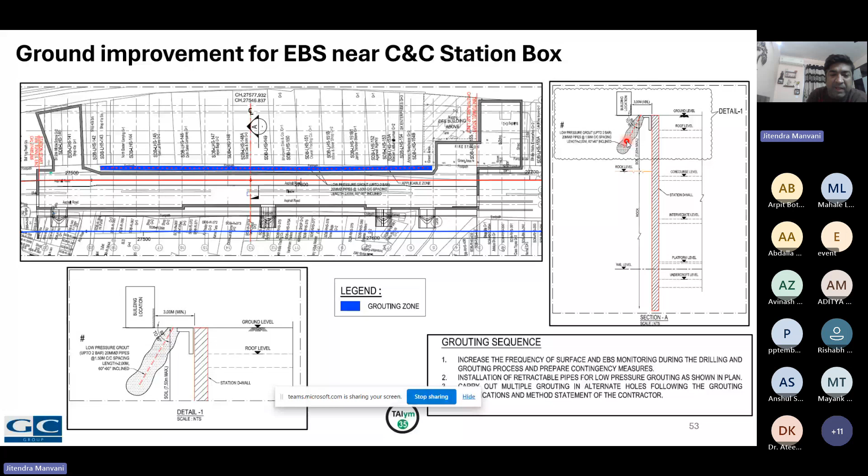During this grouting process, it is very important to monitor the buildings. The grouting pressure has to be very much controlled; it should not be uncertain. You have to control it thoroughly, and then apply the grouting to increase the strength of the ground mass.

Thank you so much. I hope it was interesting. I completed within 30 minutes — no, 1 hour, I think. If there are any questions, please go ahead. Thank you very much, sir. We will now move ahead for the question and answer session.

Yes, please check the questions in the chat box. I think we have one question. Sir, this is the best presentation. It's a good compliment, sir.

Okay, I think Rushi wants to ask something. Yeah, please, Rushi. Hi, good evening sir. Rushi here. It was really a good presentation, and to be honest, as Niranjan said, it was one of the very informative presentations.

So I have, not two questions, just one — about the AAA limit which you had set for the tunnels. Can you go back to it and explain how you determined the AAA level for the tunnels? Yes, I will go back, and I also wanted to thank my team members Arpit and Mayank who supported me; they are also free to answer if needed. Are you talking about this particular slide for the AAA limits?

Yes sir. So basically, for the stress condition on the liner, the sprayed concrete lining, we get the forces from the RS2 model. You can see this — let me put my pointer on it — the value 1375 is extracted from the maximum axial force onto the liner from the RS2 output. Then, dividing by the thickness and 1 meter width, you get the stress for this particular liner.

Using the hoop stress theory, we consider this as a thin cylinder, with stresses applied all around the liner. The thin cylinder theory basically involves internal and external pressure, which we apply to get the pressure and radial stress using the stress onto the liner from the ground. So this value of 6875 is multiplied with the liner thickness — 200mm — and divided by the tunnel radius of 5.25 meters, to get the radial stress.

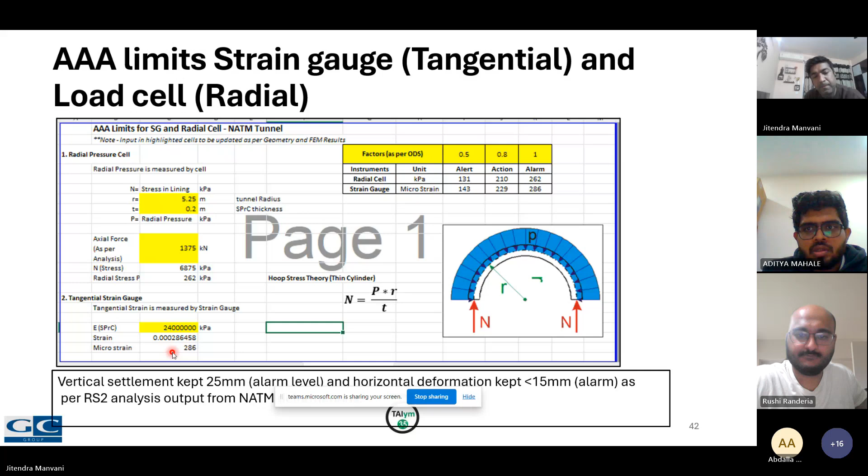Do we have any other questions from the audience? Yeah, just one more question from me. It's actually on design. Can I go forward and ask regarding the design part? Yeah, I can open the design slide.

The confinement one - I think in the confinement slide, this one. No, the one previous to that. Convergence confinement, yeah. Convergence confinement, yeah, this one.

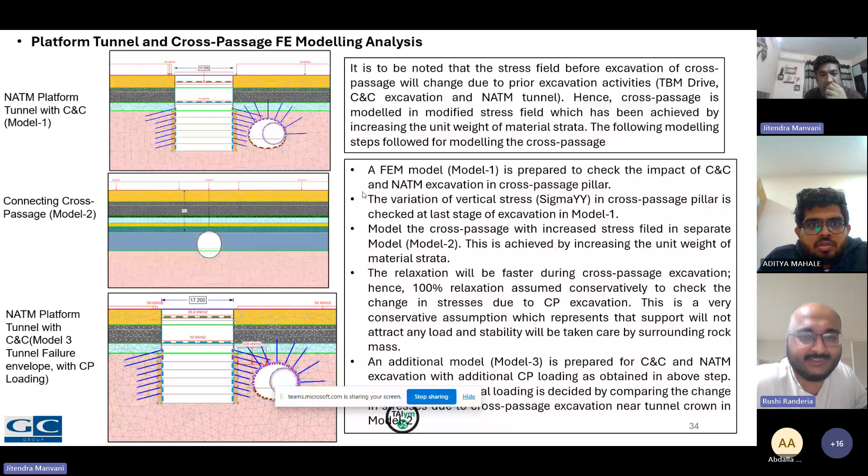So I just had one question - you said that this was in granular soil and silty soil, right? The cross passages, the top layer is silty sand, where the top 3.8 meter is the filled up material, whereas below the 7.5 meter is the rock grade 4 quartzitic rock, and the tunnel depth is 13 to 13.5 meters. So it's purely in grade 4 rock, the tunnel boundary.

Okay, so just one - because it is in the rock mass, we consider the elastic ground behavior, and therefore we use the Marc Panet approach. Okay, because that's what I was thinking - because in grade four, you are using this equation, and it was regarding the elastic limit, so you are assuming elastic behavior of the rocks. Yes, we are assuming elastic behavior of the rock.

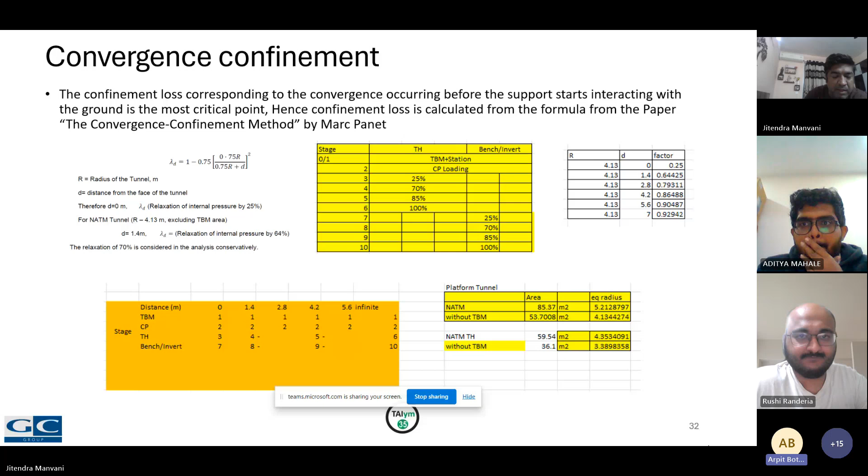Okay, actually, but if we have checked it - can I add something? Yeah, you can add, Arpit please. Actually, for this urban tunneling, the strength of the rock mass is much higher than the in situ stresses, so that's why we can keep it like it is. Behavior will be elastic during excavation. Thank you, Arpit.

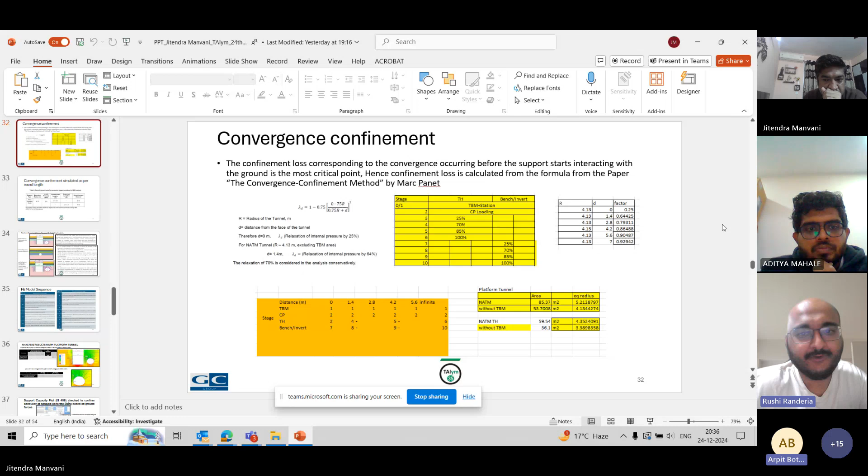If any more questions, you can mention to me, or you can interact with me separately. Also, no problem, you can type it on the chat.

I think your presentation was so good that the audience may not be having any doubt at the moment. No, they can ask me anytime, no problem. It was, to be honest, quite informative and quite in detail. So we are very grateful to have you, sir.

No, thank you very much. And there are people involved, including my colleagues Arpit, Mayank and Manjeet - there are many colleagues in my company. Seniors are also supporting us, so we are able to deliver a number of presentations. Similarly, because we deal in a range of problems, we are happy to share our knowledge with other members, and also to gain from people who belong to the same industry. So it will be helpful to share the knowledge.

Definitely, sir. And Geoconsult has been a long partner with TAIym as well since the beginning. It has given us a lot of support. So thank you, Geoconsult and the team for that.